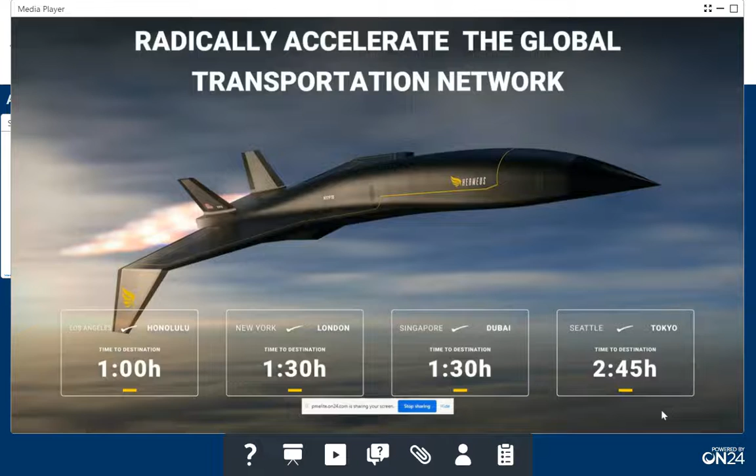For those that aren't familiar with Hermeus, big picture, long-term goal is to radically accelerate the global human transportation network. Think New York to London in about 90 minutes. However, we'd be a bit naive to think that we could go build a transport class aircraft and raise $6 to $10 billion with venture capital or private equity. It's a pretty tall glass of water there. So we have to de-risk the business case through an iterative roadmap.

We're starting with Quarter Horse, which is designed for high Mach flight testing, basically get up to high speed and be reusable. Follow-on products include Dark Horse, which has about 2,000 nautical miles of range, 2,000 pounds of payload, and can do things that are pretty interesting to agencies out there. All the while, that de-risks a lot of the technology associated with building Halcyon, which is our vision aircraft for transport, about a 20-person cabin that can fly transatlantic.

A little bit about our additive endeavors here at Hermeus. We made a significant investment in additive. One reason is simply it eliminates a lot of the costly and long lead tooling requirements. If you're talking about castings, that could be 12 to 24 months, especially in this particular environment - a very long lead item to get those, or forgings or anything like that.

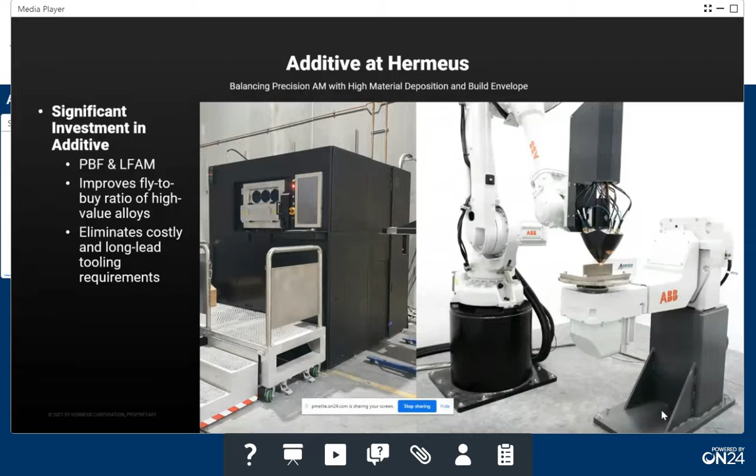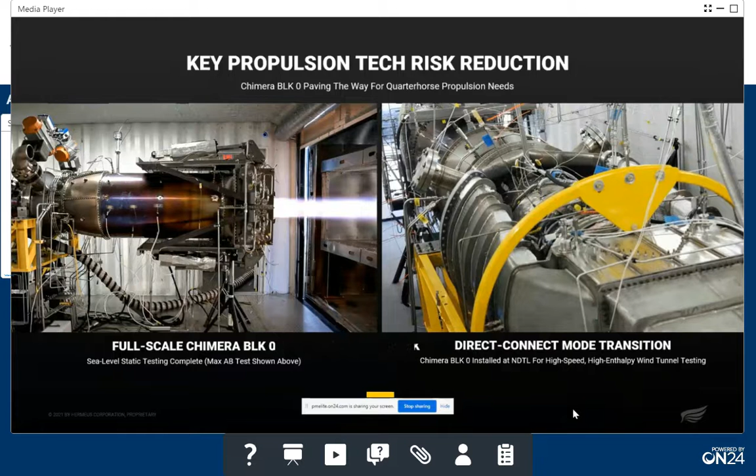We're also doing a lot of things with the vehicle, incorporating a lot of additive inside the vehicle. I don't think much is shown here in the pictures, but certainly they're finding their way into major aircraft structural assemblies and the like. But yeah, that's me in a nutshell.

Wow, that's impressive. So quick question for you, Glenn. Do you utilize contract manufacturers, and can you speak to how you have found that experience to be?

Yeah, we do. From our seed round until now we have the Velo - we definitely use contract manufacturers. We don't have enough capacity to really satisfy everything that we want to do. The reason we bought one, though, both the Sapphire and the Sapphire XC, was the fact that I've been dealing a little bit with additive, probably going 10 plus years now, with Blue Origin before. We invested in it pretty early.

Back then, you could get parts in a couple of weeks. There was enough machines out there that could satisfy the market. But the market's expanded so much, the demand has expanded so much, and there's just not enough machines out there. For something that's relatively simple to print, you're waiting months sometimes to do that.

One of the things that really attracted me to the Velo machine was the consistency from machine to machine, and the ability to create print process parameters for our Velo machine and send that out to our other contract manufacturers, which can essentially double up our capacity whenever we need it.

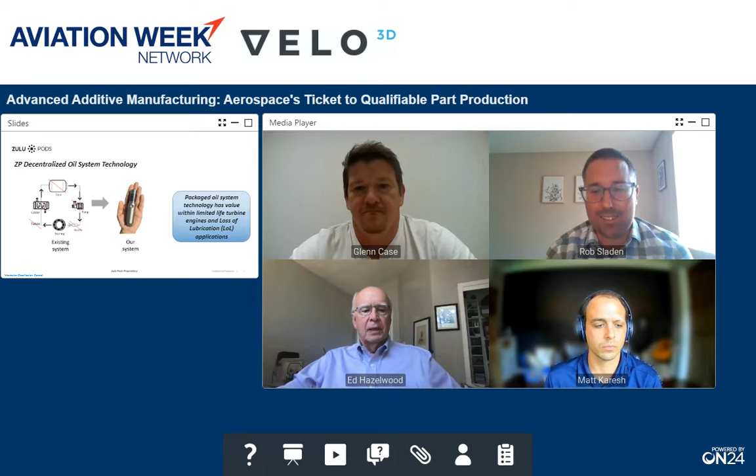All right, should we jump to our first poll question? Let's, how do we get that up there? There's our first poll question. You get it up there by saying, how do you get it there? And poof, it magically happens.

So, ladies and gentlemen, for the audience, here's poll question number 1 for today. What best describes the reason that you are joining today's session? We're exploring bringing additive manufacturing technology in-house. We're looking for additional information on Velo 3D's end-to-end additive manufacturing solution. We want help with a specific part or application, or some other reason.

So if you can click and answer this for us, I'm going to give you a little Jeopardy music. So here it goes.

And I'm going to give you a little bit more time. People are answering, I can see it coming in there. So this will give us a sense of why you're here, and then that will let our presenters talk perhaps a little bit more specifically to what some of your needs might be. So give it just maybe get 5 more people to come in. Come on, you can do it. And okay, maybe we should go to the results.

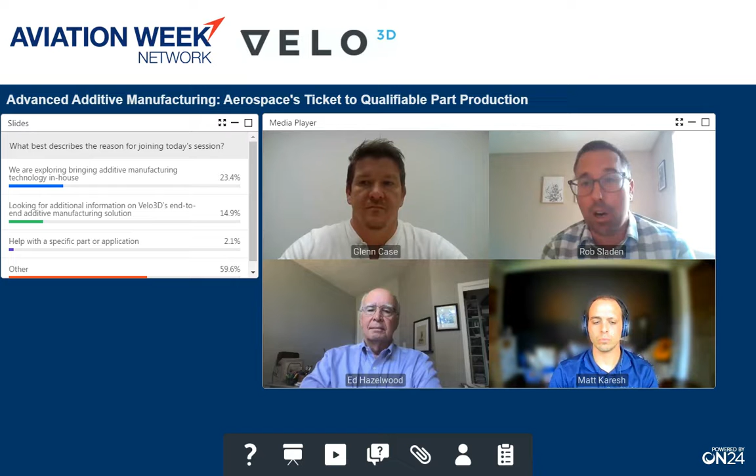In the same vein, this toolbox is also really nice for this concept of loss of lubrication. All of this is short duration mechanical system, lubrication system focus -- that's what we focus on as a company. There are times when a single engine fighter or a helicopter may experience an event where the oil system just stops working. In this case, our technology provides a weight-effective, cost-effective solution that saves people's lives and multi-million-dollar assets. Think about our pods, like the one Daniela was holding, as this little WD-40 can. I'll use this example where main oil pressure goes to zero -- now my pod can start to activate and deliver oil, providing mission-critical parts a longer lifetime after a loss of lubrication event. Our technology is truly superior to what exists out there today.

That sounds great. So why don't we go to the next poll question?

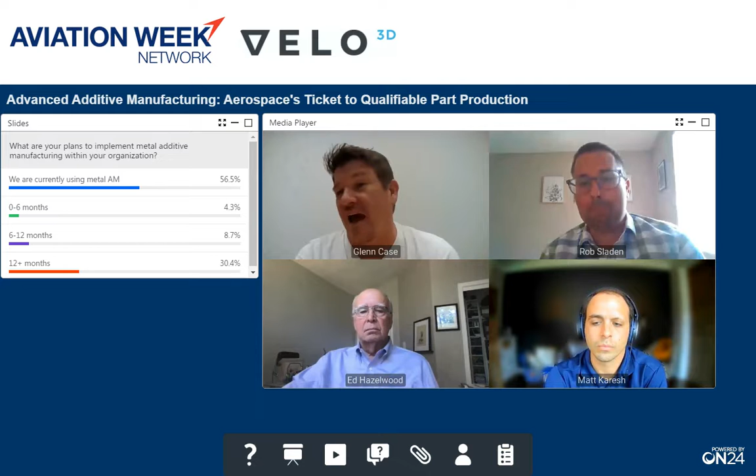I think actually additive probably takes a lot up front to get things right, but once you're right, it takes the least amount of touch labor to get you to the point. And that's where I really love additive, is the reduction of touch labor. I have great plans to create entire wing structures out of large format additive, part consolidation, and also getting rid of a lot of the things that are just time consuming on aircraft in terms of hole drilling, match drilling, pulling rivets. Any kind of time that you can reduce touch labor is a good thing.

So kind of got off path there, but in terms of workmanship, it's all about getting the part right, and then in production, it's basically, did you follow the documentation?

Matt, Rob? I concur. I don't have anything else to add.

It brings up a good point - the main input is going to be your recipe, your process parameters. That's going to form the bulk of your material. And once you've got that, like Glenn said, you lock that down, and ideally you don't change it unless you absolutely have to. Documenting everything after the fact is going to be just as important, making sure you've controlled the process throughout, and documented it appropriately.